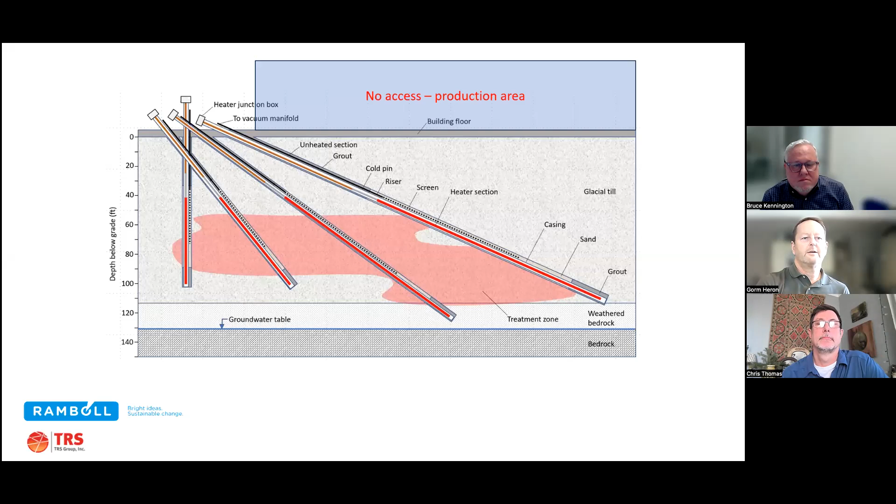We used thermal conduction heating. These red sections indicate the heated sections, and we used soil vapor extraction on each of them. So this was a very, very tricky to reach contaminant. You can see it here in another rendering. This is the 3D model of the site, the TCE source area down here, the building up here. And we had one area in which we could get access to do drilling, vapor extraction, monitoring, all those things. We talked about that last week.

And today we're going to be talking about, in this situation where you have almost no access to this whole area down here I'm circling, how do you convince yourself and your client and your regulators when the remediation is complete, when you've done enough? That's the topic of today. So in order to talk about that, I am going to ask the two other panelists here to introduce themselves before we get started.

Hi, thank you, Gorm. My name is Bruce Kennington. I'm a principal with Ramboll. I happen to be in Chicago, Illinois, although I practice nationwide in the US and also internationally. But I had the pleasure of working with TRS for implementation of this remedy for a Superfund site, the Pohatcong Valley Groundwater Contamination Superfund Site located in Warren County in New Jersey.

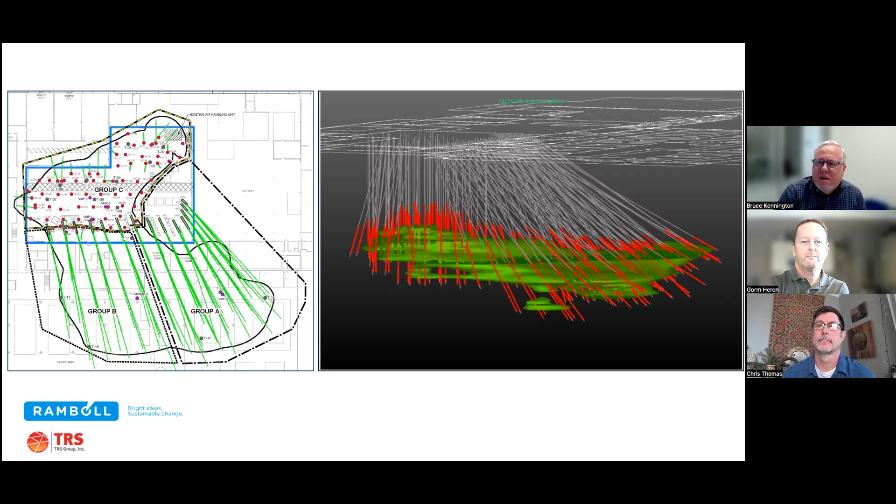We worked together over a period of roughly 3 years practically from the very beginning. Certainly it began with the design prior to that, but to get this all installed was quite involved. That was discussed on the last webinar, so I won't go into that, but it was a pleasure to work with TRS to be able to get this done. We had a multitude of challenges in front of us, not only the geometry here, but also the site setting speaks for itself, and you'll see that in some of the upcoming presentation slides. Back to you, Gorm.

Maybe over to you, Chris. Yeah, Chris Thomas here. I'm a director of operations for TRS, and I've been working exclusively with soil and groundwater remediation for my entire 33-year career now, and exclusively with in situ thermal remediation for 27 of those years.

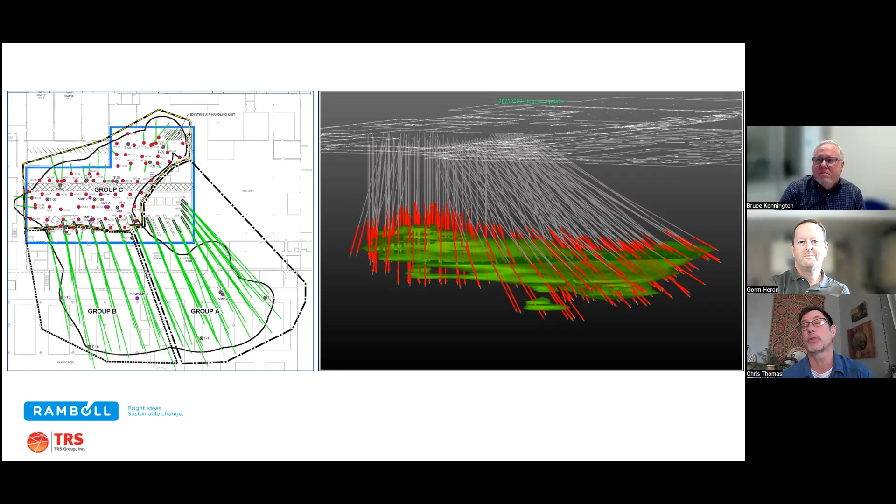And this was the most technically challenging project I've ever been involved in, and that's stressful at times, but exhilarating at the same time, and a really proud moment to be involved in this project and get to work with Ramboll and Bruce's team, and really proud of the work that the TRS team was able to perform. But it's great to be here to talk about the successful project.

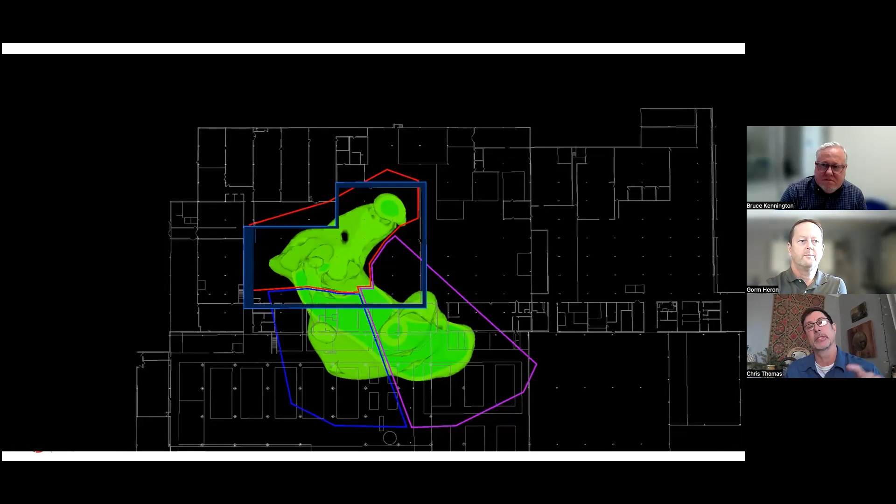Chris, I know you had prepared a little video to show again the complexity of the remediation before we get into the multiple lines of evidence stuff. You want me to play that? Yeah, please do. And to be clear, this was the work of Chad Crownover and Eli Kowalkowski, so thanks to them. But I think it's a great representation of the 2D turning to 3D, where you could see the room outlined in blue, the green blob representing the mass of contaminant, and the casings that were installed over about a year and a half.

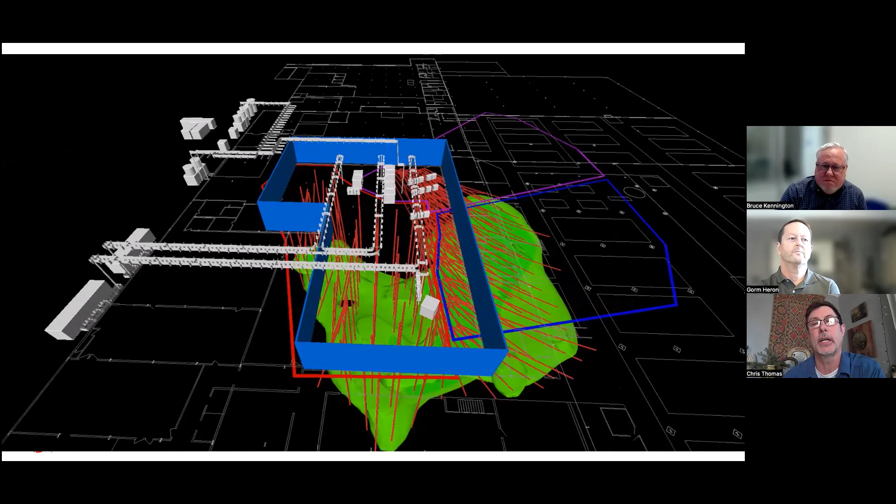It was just under 5 miles worth of drilling, but you could see that all the casings penetrate and extend through and beyond the green blob to ensure that we had appropriate heating once that system was made operational. What's shown in white here is some of the infrastructure. You can see the footprint of the building, which is an active facility, and the only space that was made available was this former molding room in blue, as Gorm's highlighting here.

But we have some of the infrastructure in place, which includes transformers and oil water separators that were actually in the room along with the rest of our infrastructure. And then to minimize any further disturbance to the facility, we ran all of that infrastructure through the ceiling, over the roof, and back out to the alleyway where we were able to squeeze in our equipment along the side of the building towards the west. Well, towards the left of the screen, we have the power control units.

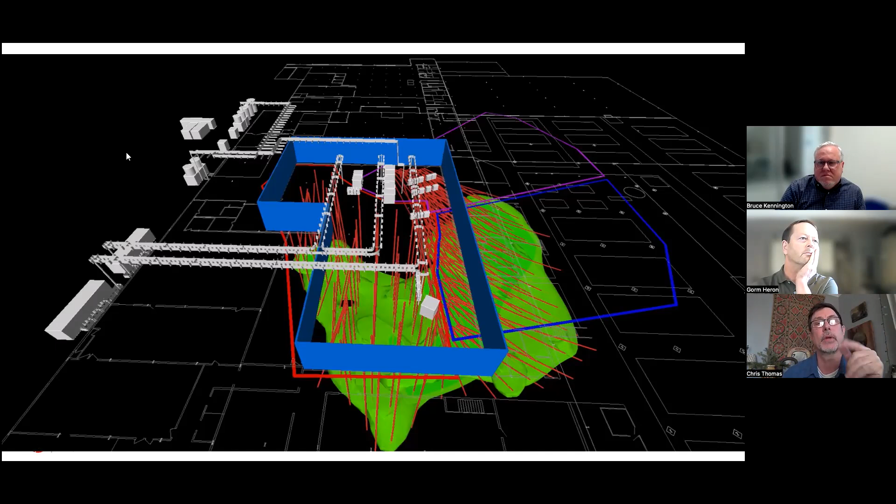Yes, thank you, Gorm. And towards the north, we had our SVE support equipment, vapor phase carbons, condensers, cooling towers, you name it. That's where all the vapor phase control was managed. It's a great video that the engineering team put together to give an idea of the extent of the major installation components and hurdles we faced when we built this project.

Yeah, if I can add a little bit to what Chris said, Gorm. Taking a look at this three-dimensional representation, we used environmental visualization software, EVS, to produce it. It was based on the data set from all the pre-design investigation drilling that we did to come up with high-resolution site characterization data to be able to represent this. You can see that the geometry of this convoluted, impacted thermal treatment zone drove everything in terms of the design for the thermal treatment system.

And without those tools, it would have been very difficult to figure out where to get things installed and how to achieve effective treatment throughout the entire zone. So TRS, through implementation, was able to get this all installed. And then we'll talk about, once we get into performance and optimizing the design, different efforts that were taken to make sure that we were achieving the remedial goals through a multiple lines of evidence approach with both our client and also the EPA, who is the key regulator in this particular case.

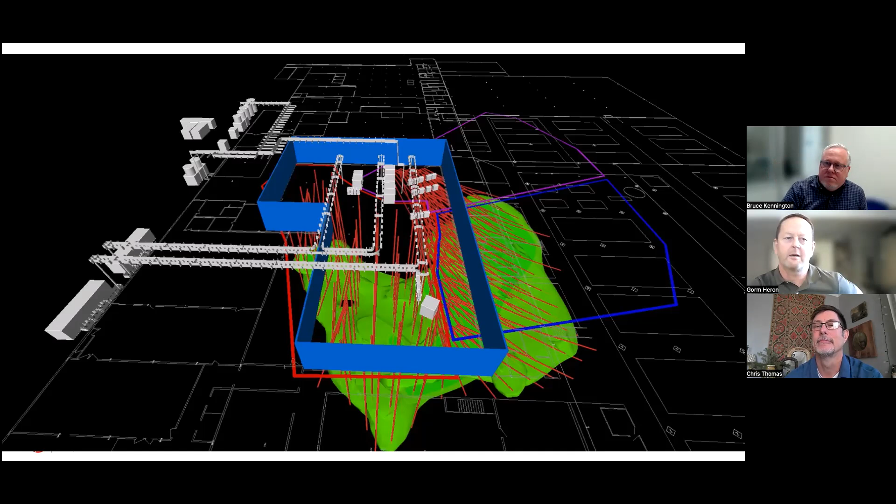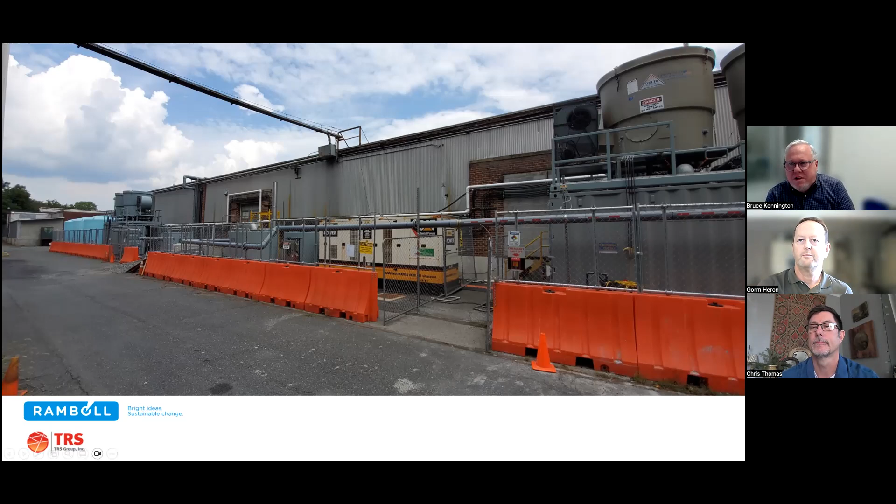So I'll ask you, Bruce, now to answer this. With all this data coming in, how did you manage presenting that to the regulators and your client in a convincing way so that decisions could be made? Yeah, we came up with a digitalization solution where we collected all this data, rather than doing it the old school fashion most of us environmental engineers know, with lots of spreadsheets and pulling data from these different sources of data and how they're formed. Some data is collected manually, like PID measurements in the field, but a lot of data is collected automatically.

TRS had a SCADA system where the bulk of the RTDs, the temperature sensors we had, automatically collected that data and stored it on a computer-based SCADA system that we were able to access. Then you also have other forms of data, such as electronic data deliverables from the laboratory with organic vapor results, for example. So a lot of different types of data sets coming all together. And as we were going down this journey of remediating this massive TCE in the subsurface soils at the site, we wanted to bring the stakeholders along with this, both our client and also the EPA.

And when we felt confident that we'd established all these metrics and satisfied these lines of evidence, we were going to be able to terminate operation of portions of the system. We set this up in 3 groups, as I mentioned before, Group A, B, and C heaters. And in collecting this data in real time, we utilized a Power BI dashboard. What's showing up on the screen right now is 1 page of that report. And we were able to more or less have continuous reporting based on the data acquired by the system that we set up and fed into this Power BI dashboard.

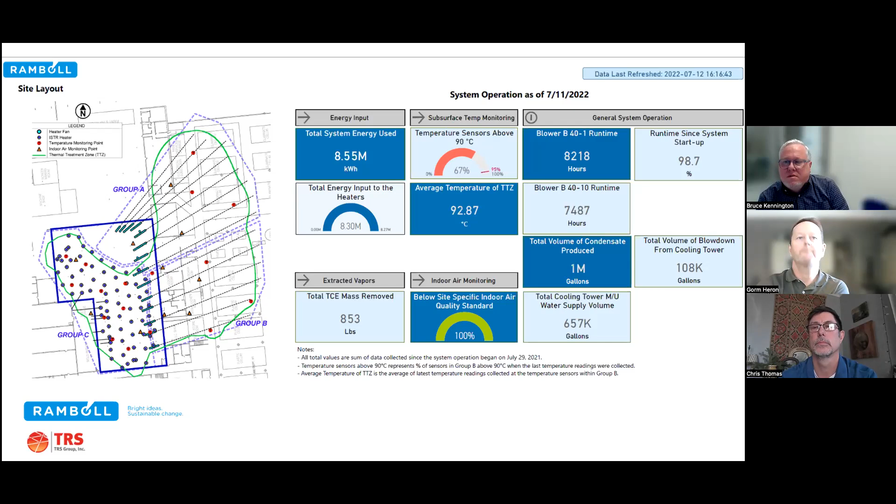Yep, that's a good one. And we have the 4 pages of the dashboard here, and don't know how much you want to talk about it. Chris, feel free if you want to comment on any of these. This is the energy input, right, for the 3 different groups. They look eerily similar.

Yeah. No, I would say we've been experimenting with digitalization of our data to convey this important information in each one of our jobs to our clients, to make sure they're able to follow on, similar goals that we had here with this. This was our first experience with Power BI, and we really enjoyed this tool, and it did streamline our data sharing process. And it was great to have Ramboll embrace it and then come up with this visualization tool for the stakeholders. But yeah, fairly standard information that's being presented here.

As we talked about earlier, we're able to track the energy applied to each of the different zones, and you can see the time scales. We did start the systems. Group A started about 4 weeks before Group C, but we're able to wrap things up in Group C a little bit sooner because of the closer spacing between elements. That was also the area that had the highest level of contamination.

But yeah, these were just a great visualization, a great representation of the progress being made in each of the 3 different groups. You can see the modeled predicted energy input, and then the actual, right? So I must have modeled the Group A one, and someone else modeled the other 2. This is before we were done. But yeah, it's never possible to be totally precise. This was pure luck, right?

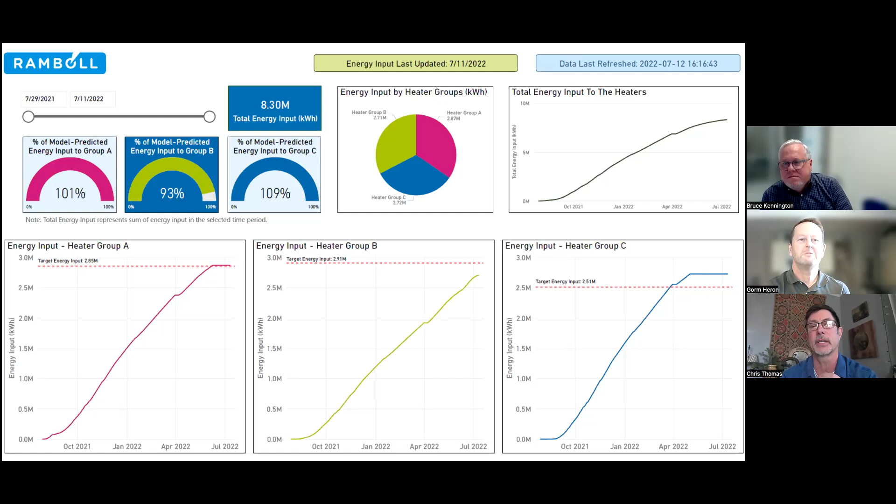So it was very clear in talking to the agency that continued operation wouldn't get us any more mass out of the soils, and that we were done. Yeah. I do think we also had maybe not a firm target, but we wanted to be at least below 10% of the highest concentration, right? 10%, that's correct. Or lower, and we were in all three groups.

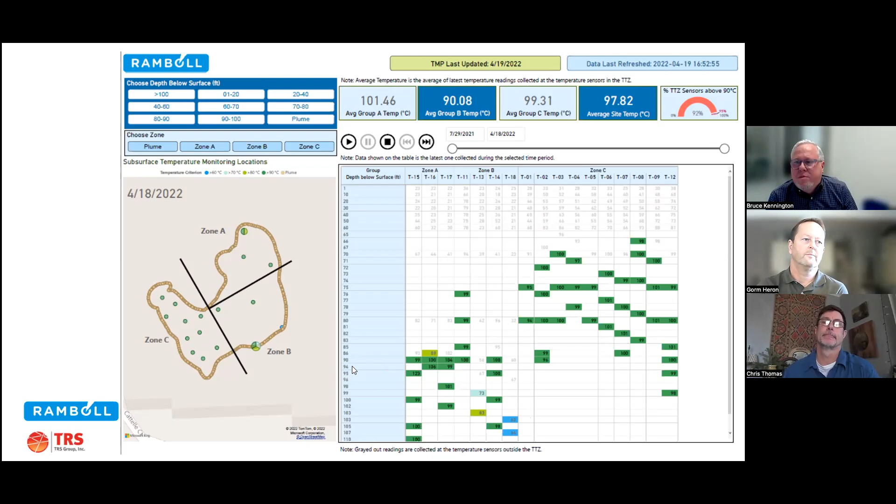And so we'll go to, you want this one or the previous one? This is fine. I think this shows those sensors where the temperatures lagged. There's that one there, and then further to the east, which is at the bottom of this figure, there's the other sensor within the Group B heater area. Yes, those are 2. You can see both of those are at the very periphery or the edge of the thermal treatment zone as we had mapped it, and also at the edge of where the heaters go. And so that presented a challenge.

We also did have some moisture that got into some of the casings, and moisture along with an electrically conductive resistive heating element with ceramic insulators, you can short circuit against the casing, and then it trips the breaker and it goes off. So there were some challenges that TRS got on top of, recognizing that we had a lag here, where they were able to dehumidify those heaters and reduce the downtime of those heaters, so they were able to have a consistent heat output.

And ultimately, these temperatures did achieve the target temperatures. But it just goes to show you, there are some challenges that you'll be faced with doing thermal treatment, particularly in an environment like this, where you can't locate everything where you want to.

We did our best to place them where we thought they would be reasonable. But we had some challenges, but we recognized the problem or the challenge, and came up with a solution. Yeah. And one aspect of that, Bruce, if I remember correctly, is that these locations, these casings were put in a year and a half prior to the final definition of the treatment volume.

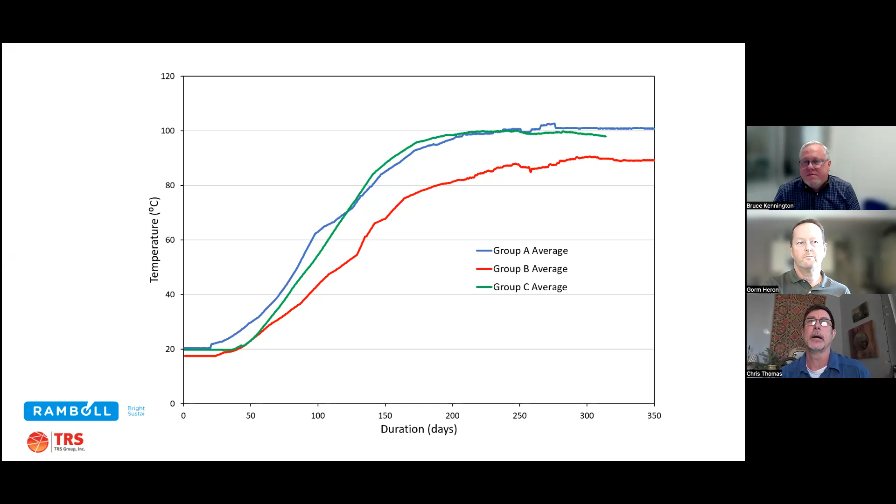All told, when we talked about the sampling dates, I think we ran a little bit long, but we could have stopped a little bit sooner. But again, there's just logistics involved with actually getting the samples collected, because we had to coordinate that with the facility as well. We're not in an open field and just collect those samples whenever we feel like. But all told, we were certainly within our time allotted.

But we do spend a lot of time worrying about these days and weeks when it comes into operations, because outside of our commitments to our client and our facility, energy is expensive. We want to use those energy dollars as wisely as possible.

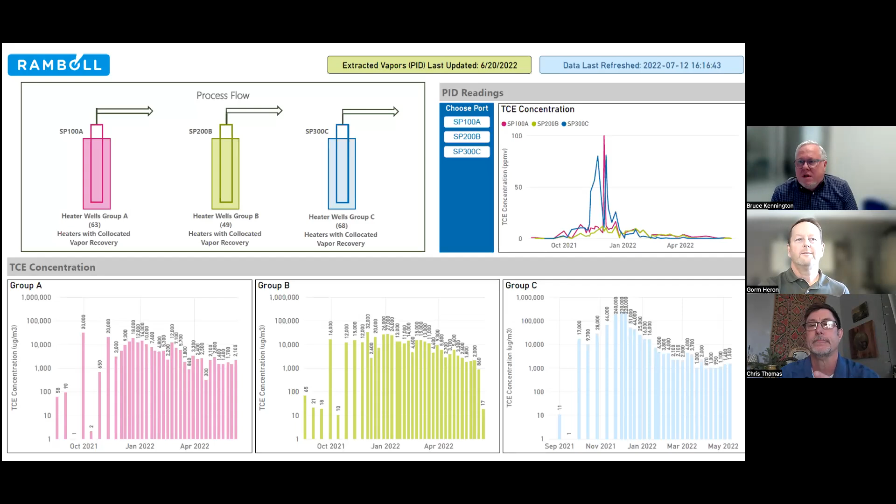Yeah, and I can add to what Chris just spoke about, Gorm, from an overall project perspective. I mean, we had a schedule with EPA with timeframes in it where work is being performed here by our client under a consent decree with the US EPA Region 2. And there are stipulated penalties associated with it.

Also, to gain access to install all these heaters inside this L-shaped room inside the building, we had to occupy part of the manufacturing plant space, and that was done under lease by our client. So we were paying money every month to be able to have access and utilize that room. So it cost our client money to continue.

The longer it took until we were in and out of there, it was an added expense to our client. So we wanted to get the project done in a timely manner, so we minimized that cost. But then there's also the risk of penalties on top of this. I would say that with the agency, we also accomplished this work during COVID.

And we did adjust the schedule accordingly based on COVID, because when the pandemic first hit, we went through a period of shutdown for about 4 months until we all figured out, certainly in the United States, how we were going to deal with COVID and how not to spread and infect people. So we came up with procedures ultimately. I won't go into any further details there, but we did adjust the schedule based on COVID.

But despite all those challenges, and I would say up front, some of the drilling challenges, 75% of this project was drilling. Only 25% of it was actually heating the soils, or some of the treatment system installation work. But this is a drilling project. So that was a real challenge, it would be a challenge for anybody, but certainly with TRS, because you guys are not a drilling company, right?